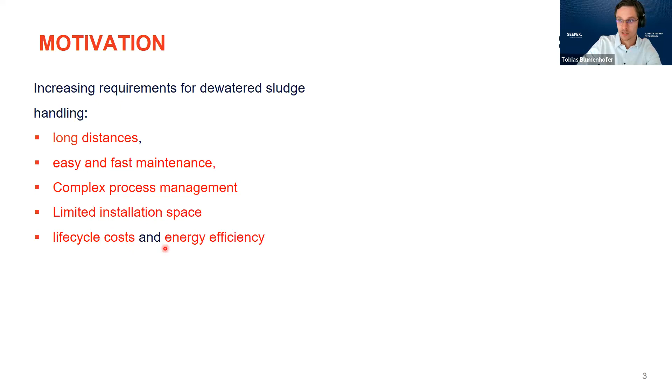What we here at SEEPEX experienced in the market were increasing requirements for the transport and handling of dewatered sludges. Customers need to overcome longer distances, they want to modernize their systems, they require easy and fast maintenance, and they have complex process management to handle on site. In some cases you even have limited installation space. And a topic always important, and getting more important, is that you want to improve the life cycle cost of your system and improve the energy efficiency of the whole system.

So the solution here, what SEEPEX invented, is a combination of two different technologies: pumping by sludge cake hopper pump, what SEEPEX is also known for. We are a manufacturer of progressive cavity pumps, and they can be applied in a lot of sludge applications. We are combining pumping by sludge cake hopper pumps from SEEPEX with pneumatic conveying. You see here one of our T-range pumps, a SEEPEX hopper pump, combined with a pneumatic air system connected to the discharge line, and also a SEEPEX dosing pump connected to the discharge line for the usage of polymers to further reduce friction losses in the piping. I will explain this in detail, but this whole system we call a package unit, smart air injection, SAI, a combined technology giving a hydraulic pneumatic conveying system.

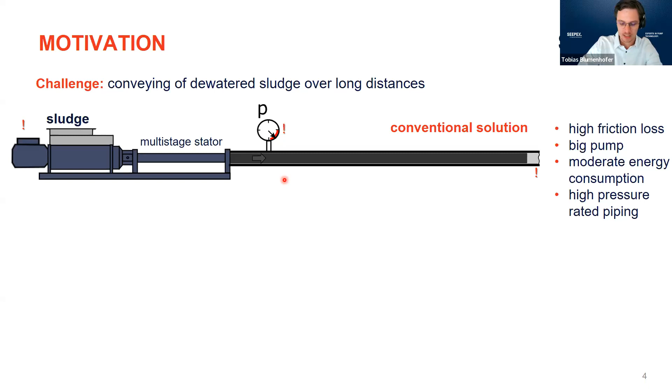So actually, when you go on site and want to transport dewatered sludges, which are normally very high viscosity products with big friction losses and pressure losses in the piping, or any other high viscosity product, and you want to convey it with high pressure pumps, you will see high friction losses you need to overcome. You need a big pump, in this case a multi-stage progressive cavity pump, with moderate to high energy consumption. And due to the high back pressure in the piping when pumping a sludge column, you also need high pressure rated piping. So it's a very challenging task to transport these high viscosity products, and the answer to improve here from SEEPEX is the smart air injection system.

So with SAI, we can use a small pump with low energy consumption. We can offer our customers the use of low pressure rated piping, and due to how this system functions, you only have low friction losses in the piping, and over the whole time a low pressure inside the piping.

How does this work? So what we are doing is pumping with our sludge pump the sludge into the piping. We put into the boundary layer of the piping a lubricant around the surface of the sludge, and then when we have a sludge column of a length of 10 to 50 meters, we open for a short duration a magnetic valve, and then we inject air from our air system into the piping, and transport the sludge only by air to the outlet of the piping. And we found this to be more efficient than standard conventional pumping by high pressure pumps.

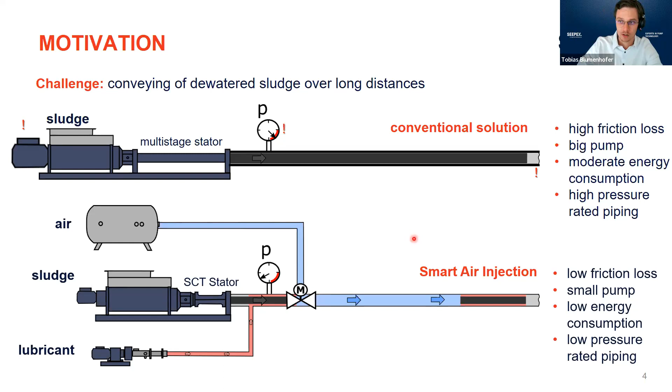So what we can offer with the SAI are low operating costs in terms of energy and maintenance, due to the low pressure in the piping over the whole time. We can offer low total investment with these products due to reduced pipe and fitting costs, because of the lower pressure stability rating required for the piping. So you can use PN16, or even go down to PN10.

For SAI, it's normally no issue to have several bends in the piping or different vertical elevations. So you are very flexible in designing your system layout with SAI and still have an efficient transport. We can go theoretically up to a distance of 1 kilometer. Whether it makes sense to design a system like this is another topic, but in theory it's possible - we can upscale this system to very long distances. And due to the smaller pumps, we can use easy maintenance technology like our SCT technology, smart conveying technology. If you're not used to it already, I will explain later on what SCT is. But with this, we can offer our customers lower downtime due to maintenance in place and increased pump life overall. And compared to open mechanical conveyors, with SAI we can offer you a closed system with closed piping, without odor and spillage.

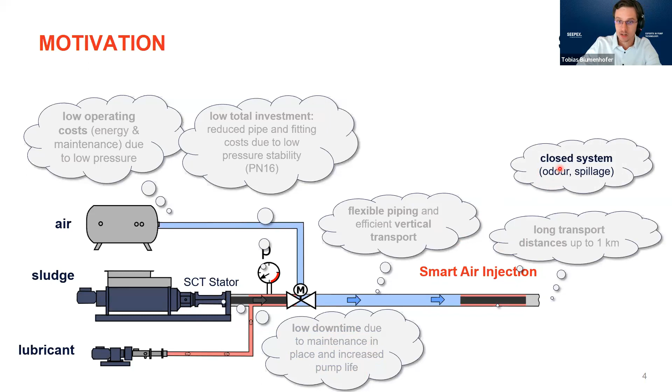And last but not least, SAI is a package unit, and it comes along with its own SAI controller that can be integrated into your SCADA system on site. One last point depends on where you are located on the globe.

We are today a very international round, but in many places where you have winter times and it gets cold outside during nights, where you are not running your system, it's very important overnight to clean the piping so you don't have any freezing. You don't need any pipe heating at all, but a clean pipe can be a benefit in general, not only for winter times. Due to the compressed air we are using, we can offer a system that is immediately able to clean itself, so you have integrated pipe cleaning by air included as part of the system.

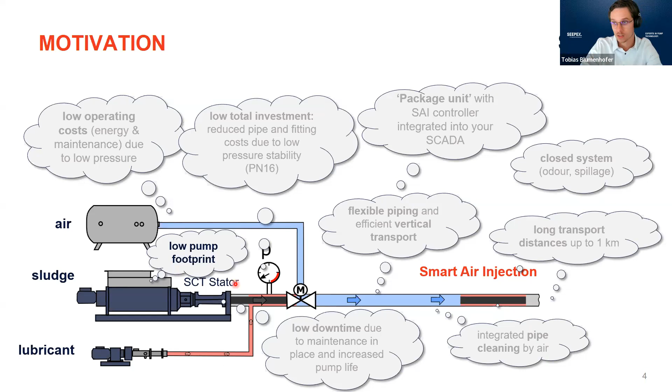And due to the smaller pump, we can offer you a lower pump footprint. So if you have limited installation space or something like this, this would also be a feasible benefit of why SAI could be a solution for you.

So normally the first question now is: you want to replace a hydraulic system with a pneumatic system, knowing that compressed air is very expensive. A compressor is kind of just a heating machine - due to the law of thermodynamics, a lot of the energy gets lost into heat, not into mechanical energy. How can this be more efficient than pumping the fluid? Give me a little bit of time to explain this.

It's not that complicated, but it's due to the nature of different pneumatic conveying types that exist. You can distinguish, as known in the literature, between different types of pneumatic conveying. There's lean phase conveying, when you're transporting pellets or granular media or something like this. But for this lean phase conveying, the relation between air and the line loading is very bad - you need a lot of air to transport a small amount of medium. You need to inject a lot of air into the piping over the whole time so it can drag the particles along. So this is not a very efficient conveying system, but it's necessary for some particles - there's no other option.

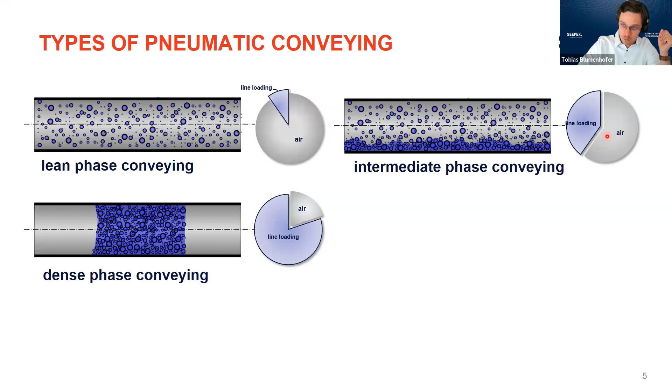And then there is dense phase conveying, which is what we are using with SAI. We have a high line loading and only need a small amount of air in the piping to convey the fluid to the outlet. You have a compact kind of plug in the piping, and this compact plug is conveyed by short-term, pulsed air injections to the outlet. This can be efficient, and we achieve a good energy efficiency because of the high line loading and low air consumption within this dense phase conveying.

And we combine this with a lubricant film in the boundary layer in the piping, around the surface of the sludge, to improve the energy efficiency even further.

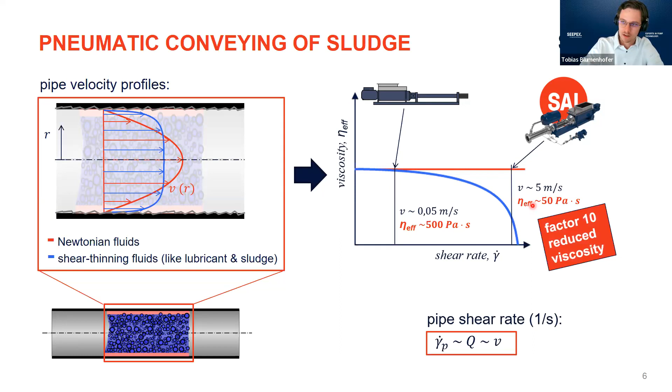So we can reduce with this effect the viscosity up to a factor of 10. Here's an example of a shear thinning fluid. It's not dewatered sludge, it's simple ketchup. But if you put a golf ball on top of this ketchup, it will not sink in. The ketchup acts like a solid fluid, actually.

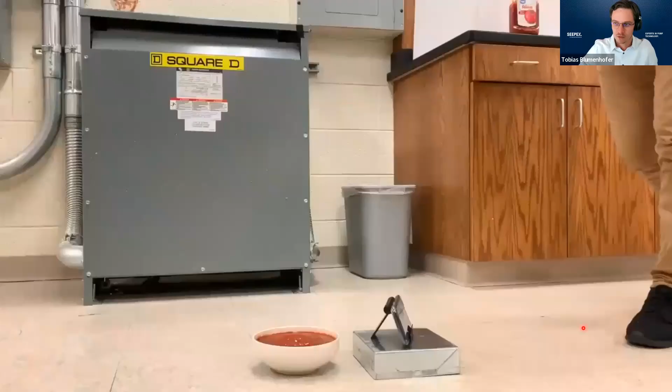But if you drop the ball from the top with a higher momentum and higher velocity, it will sink into the ketchup, and the ketchup behaves like a liquid due to the shear thinning behavior. This is just to show you, nobody would have guessed this experiment would look like this, but this is the nature of the shear thinning behavior. Maybe if you want to make an experiment at home, you can try it yourself.

But okay, so how does SAI now work? We have here the SAI system shown, we have here the pipeline, and here we see we want to transport our sludge into a silo. And here we see a pressure curve.

So over time, how does the pressure behave inside the piping? If we measure the pressure here at the outlet, at the pressure flange here, this is how a typical pressure curve would look like. So we start here, at the blue line, and now our pump is pumping the sludge into the pipeline.

And then here we are injecting lubricant as well into the piping, so that we get our lubricant film. And then by time, we are increasing the length of the plug until we reach a certain pressure threshold, which is - now I will give you some numbers so that you can imagine how the system works.

So when we reach roughly about 1 to 2 bar in the pipeline, we will start injecting the air. For a short-term duration, the magnetic valve will open and the air flows into the system, transporting the sludge into the silo. Okay, this is what you see here.

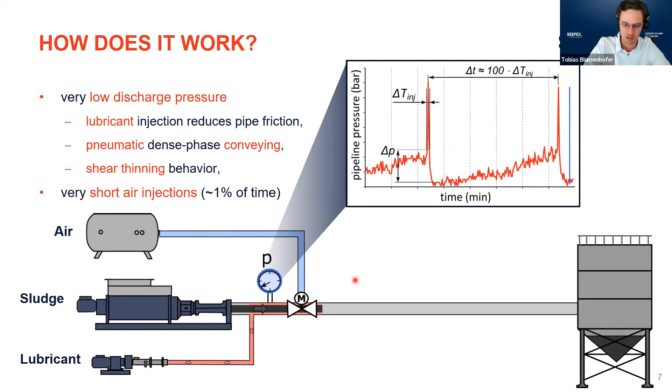Okay, so here's a live demonstration. This was one of the very first tests when we tested SAI. It's already quite a while ago, but still some nice videos to show.

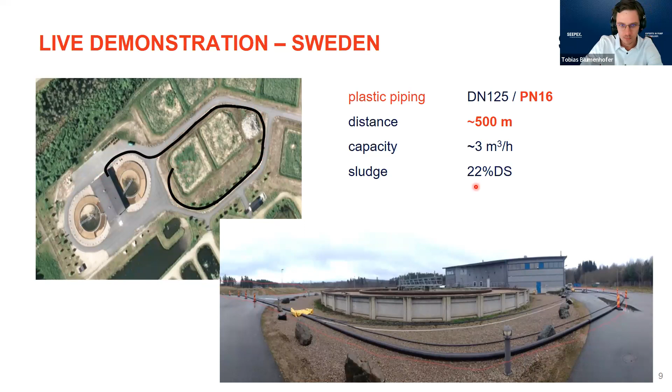For this test setup, we were using plastic piping of DN125 PN16 with a distance of 500 meters and a capacity of 3 cubic meters per hour with a sludge of 22% dry solid content. You see here the piping coming out of the dewatering building, going around this area, around this yard, and then we are conveying onto this yard. And this is how it looks like.

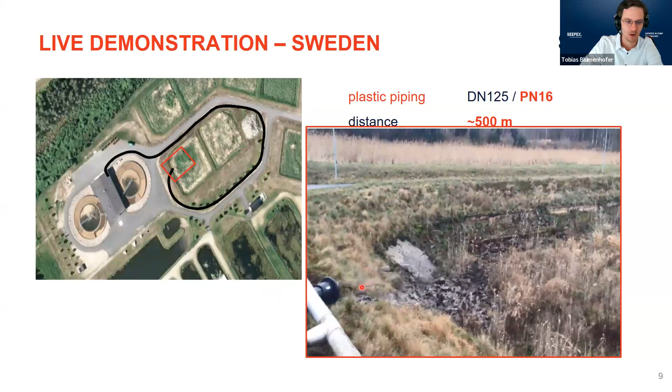You see here the sludge coming out of the piping. You see these plugs coming out and hitting the ground. That's a little demonstration of how the pneumatic transport of these sludges can look like. And you see here the high velocity of the sludges in the piping.

For which applications can SAI be used? We have a strong relation to the wastewater industry. Progressive cavity pumps are used there as a very standard technology. This is why we also started with SAI in the wastewater treatment industry for conveying of these dewatered sludges with high viscosity and high friction losses in the piping.

But we found out also for other industries, this is a relevant technology offering the same benefits I just explained, also for other applications. So as I said, tomorrow my colleague will explain to you how SAI works in the brewing and distilling industry for the transport of spent grains. If you're part of this industry, you should definitely join tomorrow our other webinar.

Definitely worth it. But also for these spent grain transport, SAI offers a lot of benefits. We also found out for waste foods, SAI is an application offering a lot of benefits too. So whatever you might imagine, wherever you are searching for a solution, SAI could maybe be a feasible solution for you. If you have a high viscosity product which can hardly be transported, when you're using either mechanical conveyors to move the fluid or really high pressure rated pumps, really big pumps, then maybe SAI might be an efficient solution for you as well.

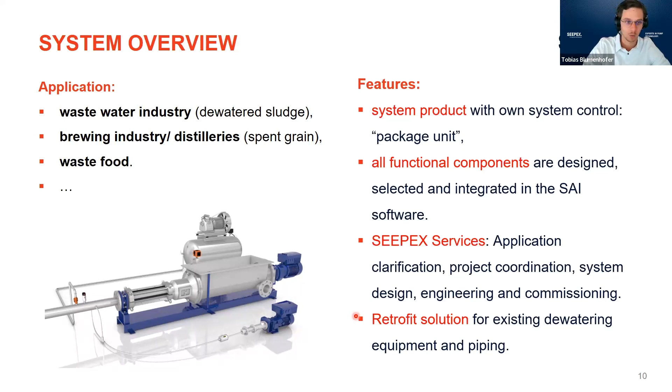So let's talk a little bit about the pumps that come with SAI. At SEEPEX in our product portfolio, we have a lot of different pump types. We have the T-range pumps, which are hopper pumps, which have integrated beside our rotor and stator, which are the main elements of our pump to create the pressure.

We have with the T-range pumps also screws and augers inside the hopper, to transport the fluids with high dry solid content into the compression zone and from there into the rotor stator element, because you cannot suck them in anymore due to the nature of the product. So you have here with the BTHE range, which comes along with SAI, the centric and edge running ribbon screw.

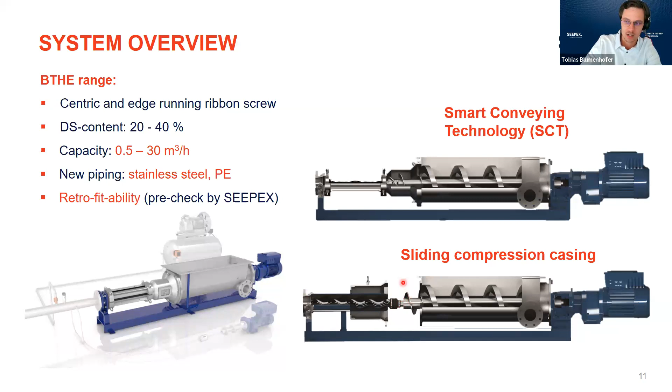Another option would be the sliding compression casing, here called the SEEPEX drive joint access. With this compression casing, you can move this or simply put it away, and then you have access to the rotor joints and can directly disconnect here. This will also improve the maintenance.

Okay, what are the different SAI system options? SAI is a customized system solution, so based on your requirements and specific application and needs, we will design the SAI system.

We have different options for the number of injection points for lubricant and air. This is something we would consider for very long distance transportation - for pipe cleaning and so on, we would foresee different numbers of injection points along the piping. For the transport of the sludge, we would foresee the first injection point for the air, and for long distance pumping we would also consider different lubricant pumps along the piping to maintain the lubricant film around the sludge. But for most SAI applications, one air injection point and one lubricant point is the standard.

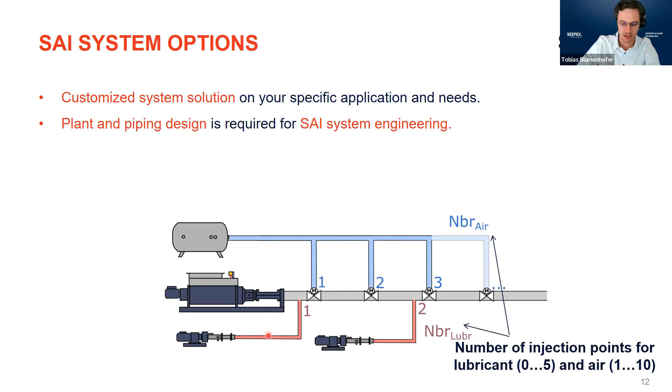Based on the requirements, the piping design and layout, we will size the system - the flow rate, dry solid content, and so on. We will size the pumps and also the air components.

You can order the air components directly from SEEPEX as well, or organize them yourself based on our specifications. You could also use an extension hopper by SEEPEX to connect, for example, to a centrifuge.

I skipped here the material options for the valves and fittings - normally we use stainless steel components as standard. You also have the option for different level control technologies, so you could use radar, laser, or load cells.

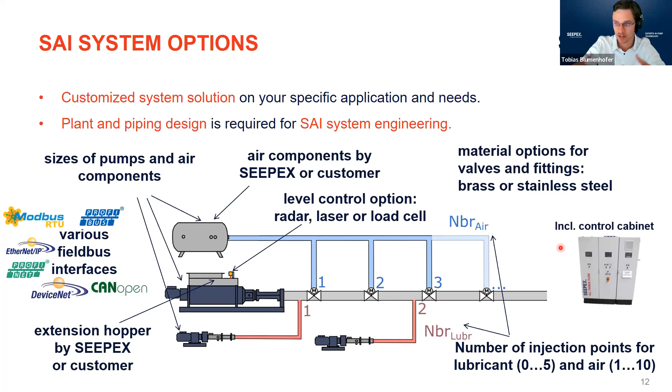Via different field bus interface standards, we can connect - we are flexible here and can connect to your SCADA system so that you are able to control SAI also out of your control room. For all the hardware, the PLC and so on, we can offer you a control cabinet from SEEPEX so that you get a complete system solution for the SAI from us.

So the system overview - let's talk about the special components here. You have the hopper pump part of the SAI system, the compressor, the air receiver, and we have a specially designed adapter spool piece here.

Here we have the laser level control in this example, but you could also have a radar sensor or, underneath the pump, load cells. With these technologies, we could realize the level control. We have also included overpressure protection, and temperature sensors for dry running measurements, so that we can give a warning when the pump is running dry.

Here's a more detailed sketch of our specially designed adapter spool piece. You can screw in all the sensors required for SAI control, such as our injection pressure sensor. Then we have the manifold for lubricant and flow separation of the lubricant, so that we can evenly distribute the lubricant around the surface of the piping.

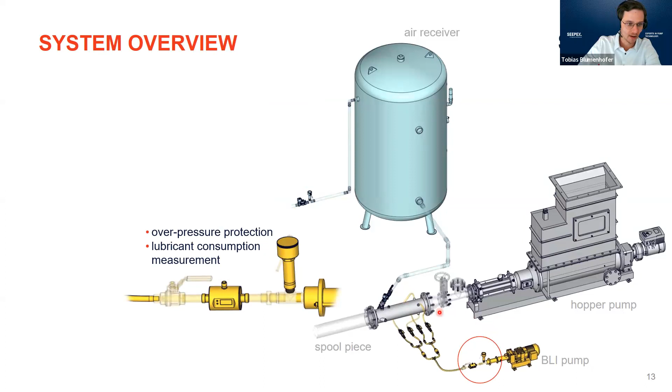Then we have a specially designed air valve set, which contains manual ball valves, non-return valves, and the main actuator, here the solenoid valve. Between the compressor and the air receiver, we also have an air consumption measurement device. On our lubricant pump, we have overpressure protection and a lubricant consumption measurement device.

You might now ask, why do I need such an air receiver? Why can I not directly connect the compressor to the piping for air injection? Normally we have cycles with a pause time of 5 to 10 minutes between every cycle, and during this time we can use a small compressor to slowly reload the air receiver. But when we open the solenoid valve to transport the sludge to the outlet, for 10 to 20 seconds we need a rather large amount of air. This is why we have an air buffer between the compressor and the SAI pump, or between the piping.

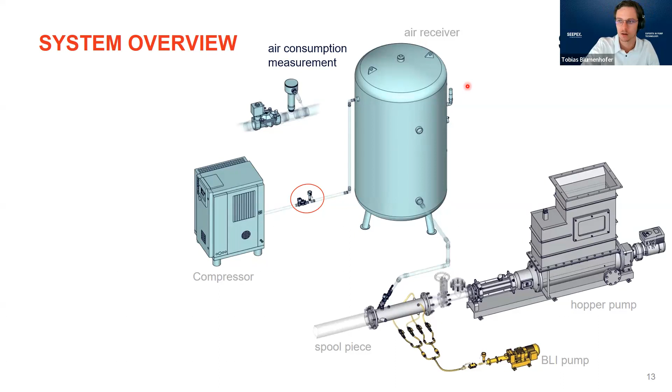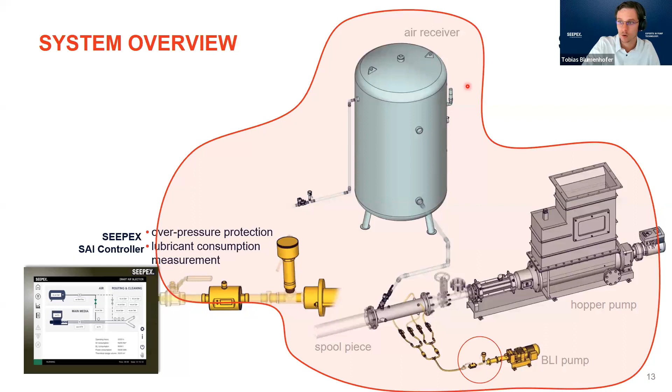Last but not least, all the actuators and sensors are integrated into the SEEPEX SAI controller, which is the heart of the system. It's a Siemens controller, or it could be an Allen Bradley controller - we offer platform independent controls. The controller is for visualization and monitoring of the SAI process, including fault diagnostics.

From here, you can control flow rates like sludge and lubricant, and control air injection for dense phase conveying, as well as all safety functions like overpressure and dry running. You can measure the consumption of compressed air and lubricant, and from here we can integrate into the SCADA system via field bus communication.

On top of this, we can also connect the PLC via the SEEPEX pump monitor to our monitoring cloud, which is the SEEPEX connected services. From here, you can get access to a dashboard and see all the data on the condition of the SAI system.

So when you have, for example, a center for maintenance planning, the people doing the planning also have access to the SAI system, to look into the system operation and operating point. You can see the air consumption, current, speed of the pump, or whatever values we are measuring in the field shown here.

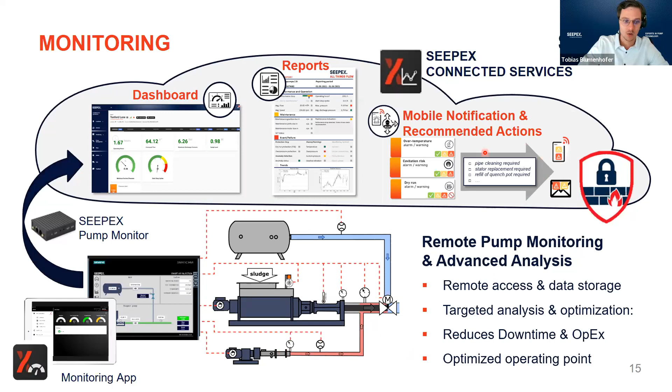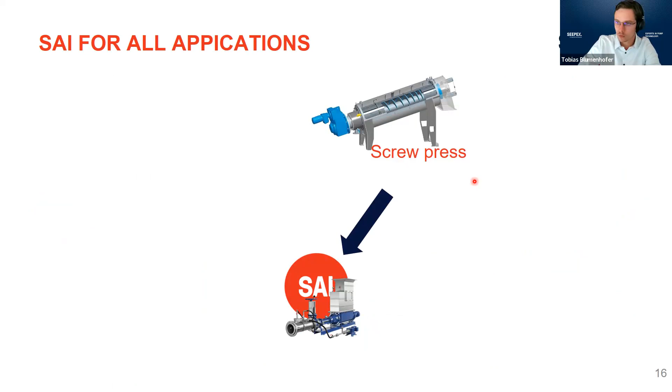So for which dewatered sludge types of application can SAI be used? We have installations in the field already with screw presses, belt presses, filter presses, and centrifuges. We can install the pump underneath a silo for emptying, or we can convey into a silo with SAI.

We can install SAI underneath a reception bunker. We can also convey into solar drying systems, which especially in the south of Europe gets more and more interesting. So for all these applications, SAI is a feasible solution.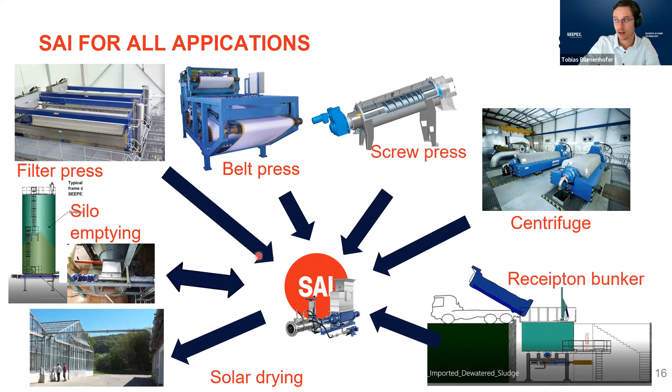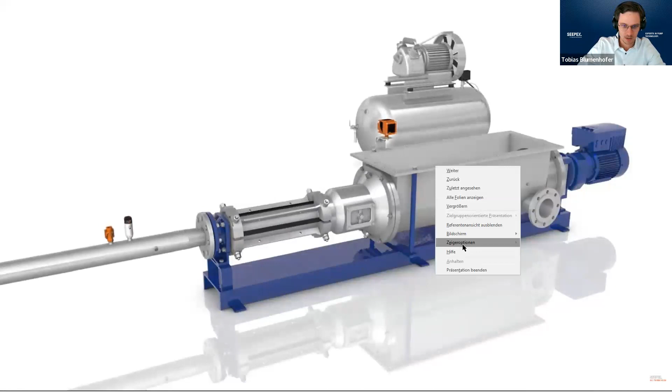Now let me finalize the theory part with a small animation so you get a feeling of how this looks. Here you see our BTHE SEEPEX hopper pump, with the air system connected to the discharge line, the magnetic valve, the pressure sensor, and the lubricant pump connected to the discharge line. Here you get a view into the pump.

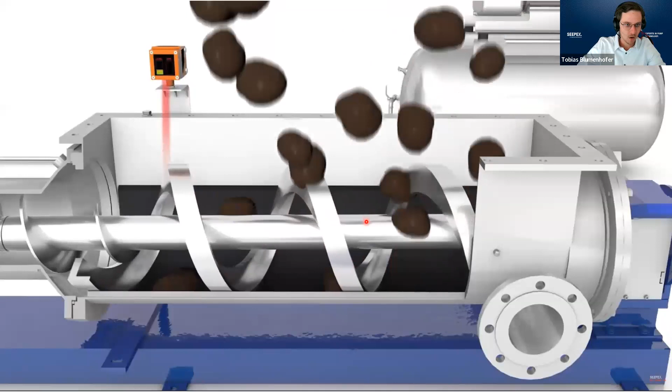Here you see the auger rotating and the sludge coming from the top, conveying the sludge into the compression zone of the pump. Here you see the laser sensor recognizing that the level is increasing and the pump speeding up. This is our level control system to avoid overfilling of the system.

From here, the sludge gets into the rotor stator elements, where we lubricate it with a lubricant film. As described before, we are measuring the pressure, and when our control system recognizes we've reached the pressure threshold, we switch and open the magnetic valve, injecting air into the piping for a short duration. Then this cycle repeats.

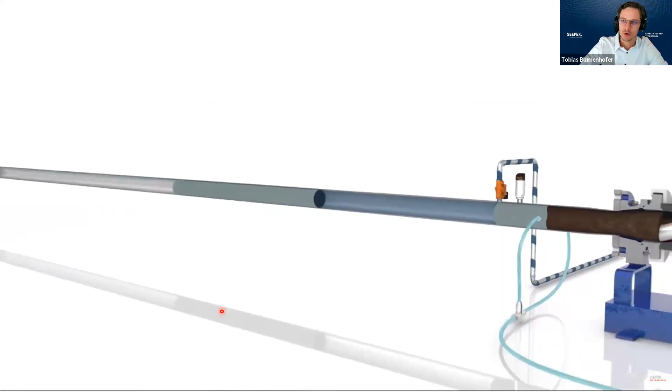Okay, let us go further on. I will go ahead with a look on the time, and try to keep it short and not too boring. We have seen a lot of theory and a lot of benefits I claimed you have with our SAI system, but now what is missing is the proof of this concept. That's why I put some case studies in here to discuss with you today, to give you a feeling of the efficiency of the system, what the costs are, and how it compares to other technologies.

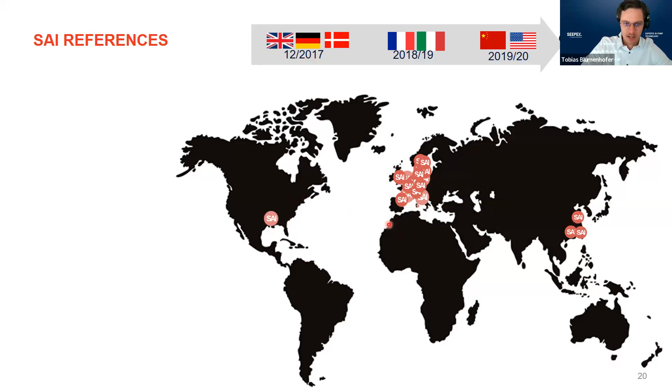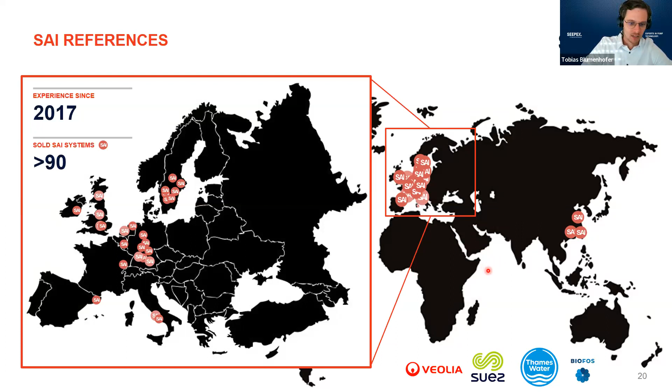So let's go ahead. We have, in the meanwhile, a lot of SAI references in Europe, where we started initially in 2017 by launching SAI. We now also have installations in the USA and in China, but our core, since that's where we started the launch, is still Europe. In total we have over 90 SAI systems already sold, including to customers or names that might be familiar to you - we have installations at Veolia, Suez, Thames Water, and BIOFOS in Denmark. So big water authorities already have SAI installed on their site for transporting dewatered sludges, and we see more and more interest in the market for this technology. Let's move to a case study from Germany.

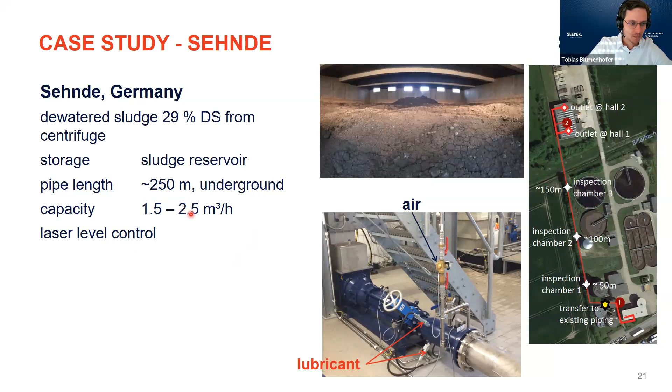Here you see the SAI system, our BTHE pump with SCT technology. Here you see the lubricant injection, and here you see also the air injection. We are using laser level control technology. Pipe length is 250 meters, capacity going up to 2.5 cubes.

From another perspective, you see the dewatered sludge falling from above, from the centrifuge into the pump, and it is then conveyed into the pipeline. The piping starts here at the centrifuge coming from the dewatering building, then conveying underground 250 meters, even below this river, into hall 1 and hall 2.

Into the building here. The initial condition was that the customer had a piston pump in use, and their pain was that they had significant maintenance and energy costs. They had an installed driveline up to 45 kilowatts, and during startup phase of the system they had realized 80 bar in the piping, and in operation 70 bar.

The maintenance cost for this piston pump was 15,000 euros a year, which is already a lot. And they had also to inject 300 liters of water to convey the sludge into the building 250 meters away, to make it pumpable at all.

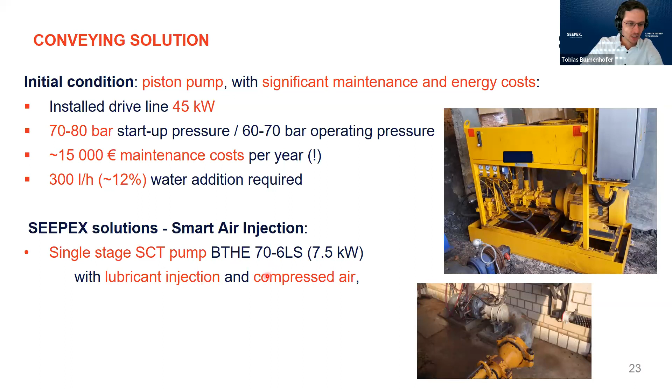So the SEEPEX solution we foresee here was our smart air injection system with single stage SCT pump, with 7.5 kilowatt drive, with lubricant injection and also compressed air. The challenge was they had installed a steel pipe DN200, PN160, really high pressure rated piping because of the piston pump installed underground.

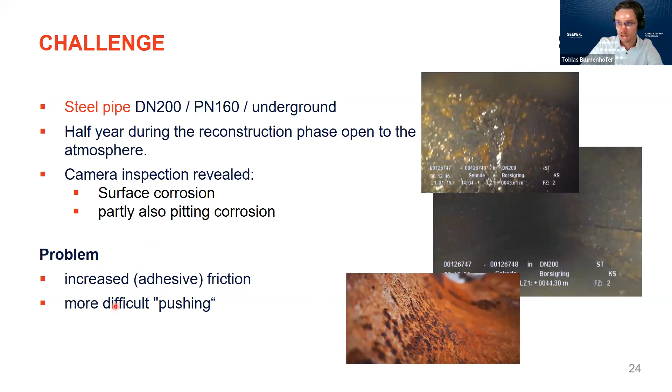Unfortunately, during reconstruction, the steel pipe was open to atmosphere, and they had some severe issues with surface corrosion, and partly also pitting corrosion. The problem due to this corrosion was increased friction, and it was also more difficult for the SAI system to push the sludge through the piping.

Nevertheless, SAI is now running here since 2019, and since then they are using the system, especially in the first 2 years - we are now in the fourth year. I would need to ask our sales experts if they are still running without spare parts, but for 2 years they were completely running without spare parts, which was already a giant step forward compared to the piston pump.

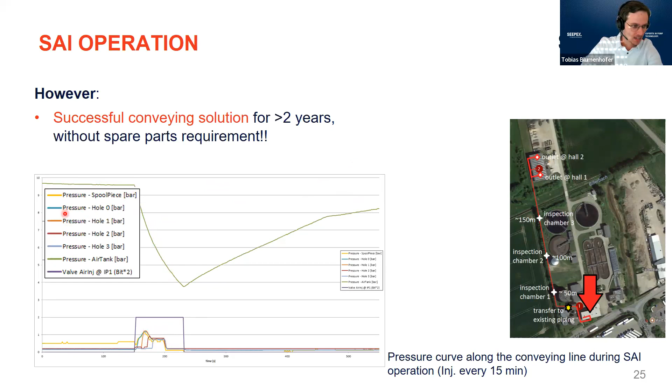Here you see also the pressure curves. Here we have the pressure inside the air vessel. When we are injecting air, the pressure is dropping, and here we see the pressure in and along the piping. We had different positions where we measured the pressure inside the piping - position hole 0 to hole 3.

When the air is injected and the plug is transported along the piping, you see the first pressure increasing, the second one, the third one, the fourth one, the fifth one - 1, 2, 3, 4, 5. Then when the plug leaves the outlet, the pressure is immediately dropping, so the pipe is cleared and the sludge has reached its destination. The cycle has an injection roughly every 15 minutes.

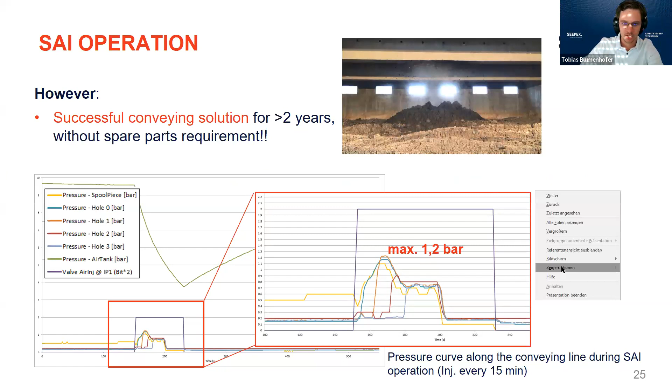I just want to show you a video. You might now ask, how does it look like when the sludge enters the building here? You see this smooth breathing of this sludge hill - the sludge enters very smoothly into the building.

Let's discuss the life cycle costs a little bit. The Stadtwerke Sehnde, the municipal wastewater organization, gave us their life cycle costs they had for the piston pump, and we compared this to the new SAI installation here.

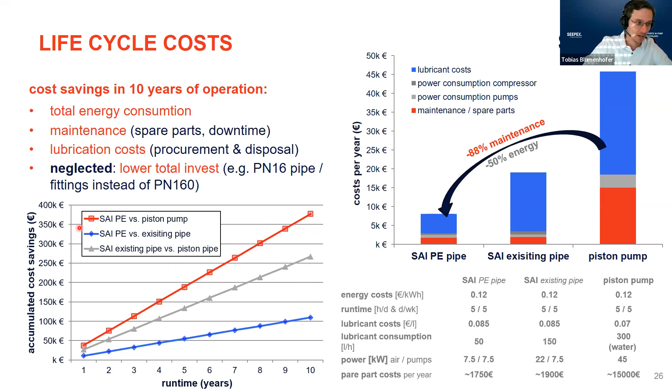So you can save here over 250,000 euros in this period. This was the Stadtwerke Sehnde here in Germany.

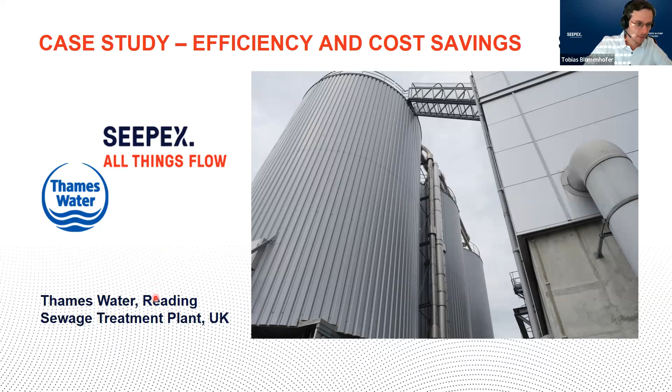We have another example from the UK, where we have already a lot of SAI systems installed in the meanwhile, especially for big water authorities like Thames Water, Reading, a very big sewage treatment plant in the UK. So the plant condition here looks like this.

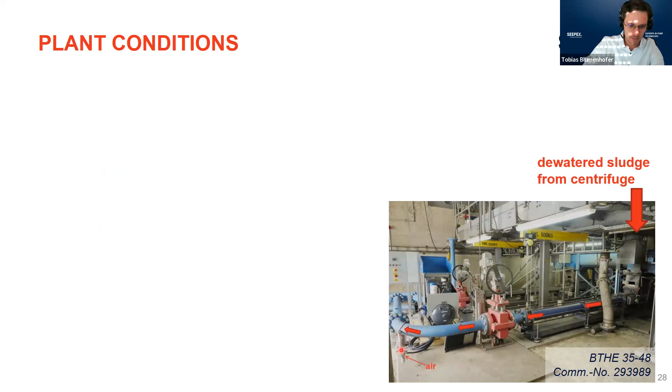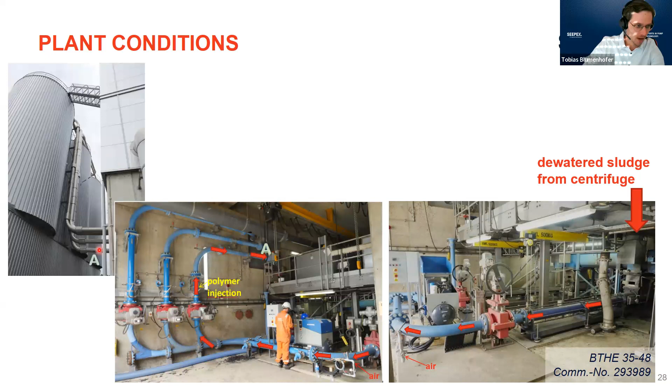You have here the sludge coming from a centrifuge into the pump. So the dewatered sludge from a centrifuge is then transported along the piping. Here is the air injection, and then we have 3 different destinations where we can transport our sludge to - silo A, B, or C.

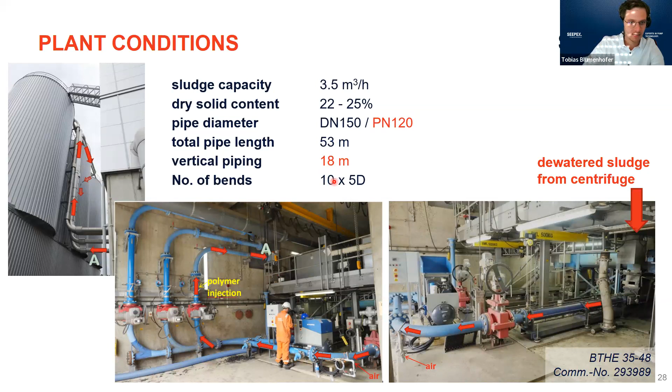The data here: sludge capacity 3.5 cubes, up to 25% dry solid content, DN150 pipe diameter with PN120 pipe pressure rated piping. Pipe length 53 meters, 18 meters vertical, and 10 5D bends in the piping.

And the status quo was that the customer here had big pain due to the piston pump, which was unable to handle the 25% dry solid content sludge, and which exhibited enormous maintenance and energy cost. That was the initial situation.

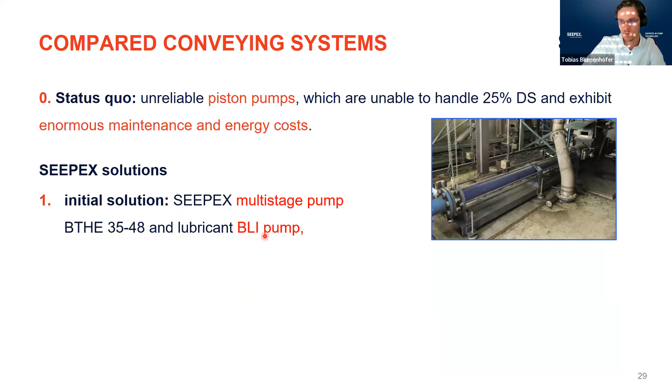Then SEEPEX installed a multi-stage progressive cavity pump, an 8-stage pump. You see the size of the big rotor and stator here as well, so it's definitely not a small pump. It needs also to overcome big pressure. But we combined it here with a lubricant pump to reduce the friction losses already to an acceptable level.

Then we installed a trial installation, a mobile compressor, just for testing. This was the first trial installation, where we then tested the SAI with the multi-stage pump and the BLI. And the optimum solution here for this application would be a one-stage SCT pump with BLI and SAI.

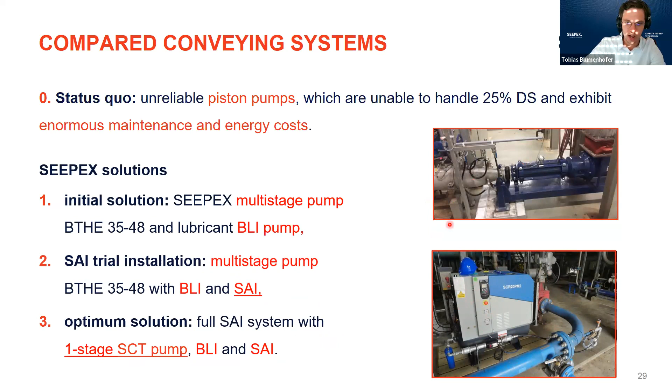We have here a very similar application on another site, which we can use the data to refer to. So this is what we have done here, and we compared the energy savings from the piston pump to the multi-stage PC pump to the multi-stage plus air to the one-stage SCT and air. We already achieved big savings, a big step forward compared from piston pump to the multi-stage progressive cavity pump. But we could even improve with multi-stage plus air.

So from 27 kilowatt roughly to 7.4 kilowatt. But here you have then on top the power for the air consumption, which is here 2.6 kilowatt. And then we have here the rating for the one-stage SCT plus air, which is here roughly about 3 kilowatt, with 4 kilowatt air on top.

And these were measured results, based on a similar plant. With this, you can save up to 72% in terms of energy, from the piston pump to the SAI system. But don't forget the operating pressure - piston pump coming from over 60 bar, we are now down to 2 bar in operation, which is a big step.

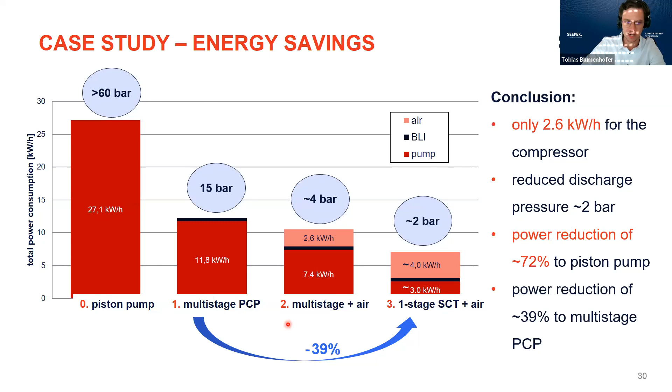But even compared to the multi-stage PC pump, we normally can experience for those applications up to 40% in terms of energy savings.

Thames Water were also open to give us data on their piston pump and what they consumed in terms of maintenance cost, energy cost, and use of polymer. They used the piston pump without any lubrication, which we had to add with our pumps and with the SAI. But in total, compared to the piston pump, we can save 80% in terms of maintenance and 72% in terms of energy.

This was also a retrofit application, PN120 piping, compared to PN16 or PN10. If you would plan a new system with new piping, you would achieve a lot of savings in your investment.

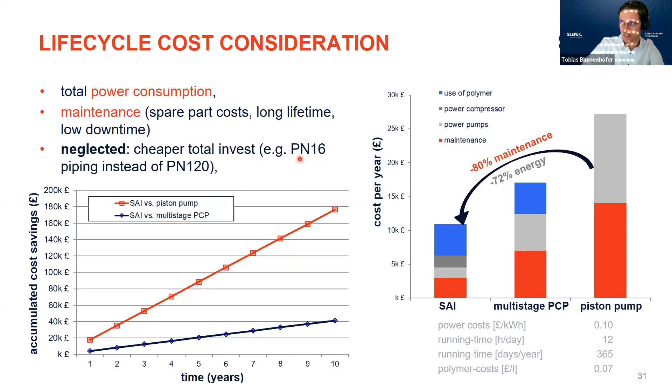Okay, last but not least, Osberstown, Ireland. This is an application from Veolia. I like this application because it shows you how flexible you are in designing your process with SAI, especially due to the smaller pump footprint we can offer you.

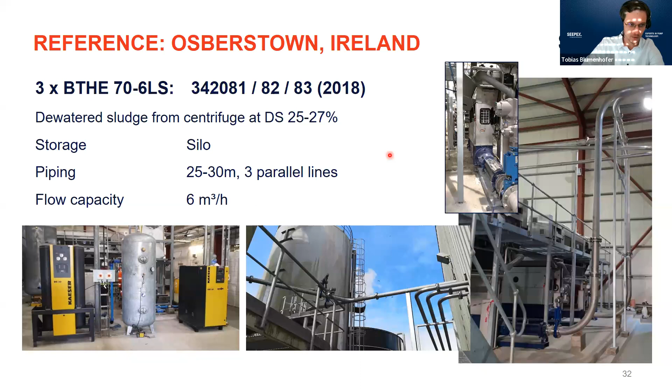The challenge here was that Veolia wanted to exchange their thermal dryer system for an anaerobic sludge digestion combined with the thermal hydrolysis process, in order to save CO2 emissions. The challenge was to integrate the new process into the existing building, which was originally designed for 2 sludge dryers. But now they had to fit in the new sludge dewatering system with 3 belt filter presses, a new polymer preparation station, and the THP process.

Veolia had designed an Exelys process which already reduces the installation space required for THP, but there was still not enough space for conventional sludge pumping systems.

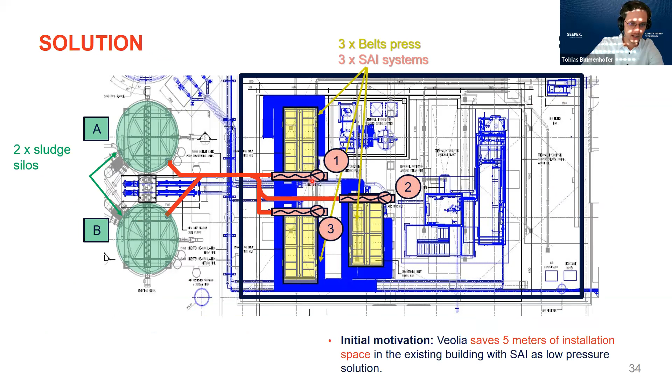So here's the layout. We have the silos, the 3 belt presses, and here we have the 3 SAI systems. There was not enough space for big pumps, but with SAI, they could fit the whole process completely into the existing building.

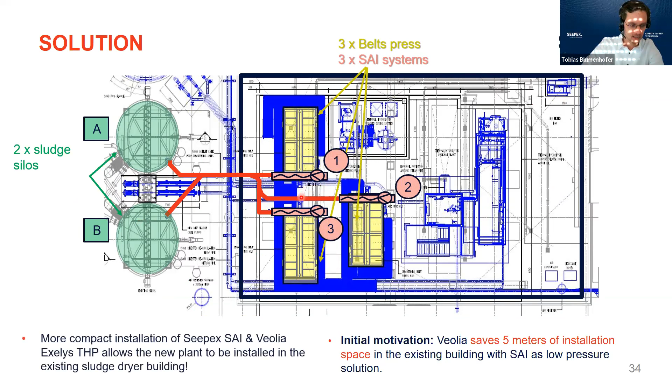We also compared internally the SAI against our 4-stage pump in terms of lubricant consumption, energy savings, and spare part costs, and came to the conclusion that we have savings in terms of maintenance and energy as well, up to 64 and 40%.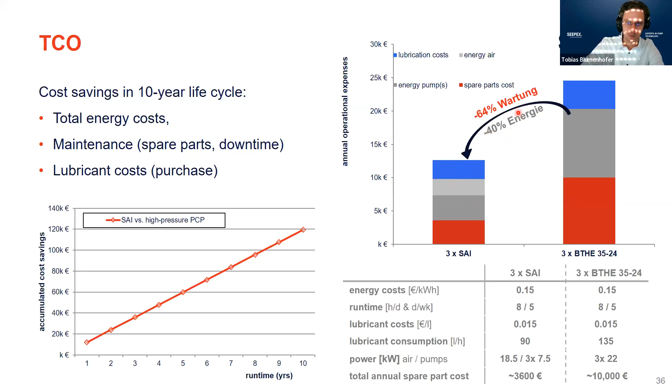The project manager from Veolia, Alan Whitty, and we are allowed to use his phrase, said: I have worked with sludge cake pumping systems for 17 years, but I have never seen anything like the SAI installation at Osberstone. I'm extremely impressed with it.

And Veolia, since then, we are also now in discussion with them for other SAI systems. So I think they were very happy here.

We are allowed to give you the references from Alan Whitty, and we also have references from other customers. So if you are interested in getting in contact with other customers using SAI, and not only hearing our opinion on SAI, we can give you a reference list with other customers already using SAI as part of their daily business.

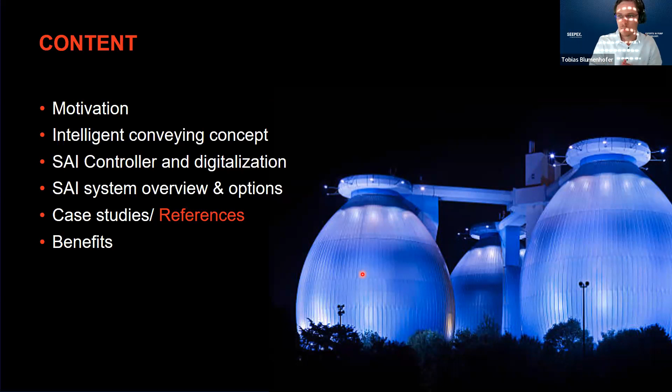Okay, these were only 3 case studies. Now, last but not least, I put together some references to show you a little bit the flexibility of SAI, so that you might see a system where you say, oh, this would be an application for me. So let's start here with a small reference list.

So, wastewater treatment plant, the municipal wastewater treatment plant Kaufbeuren in Germany. We have installed 1 SAI system with centrifuge sludge going up to 33% dry solid content, piping 40 meters, 20 meters vertical. The pump is installed in the basement underneath the centrifuge, conveying into the other silo here. You have the control valves to switch the destination, the controller, the pump including the hopper, and here you see the air station.

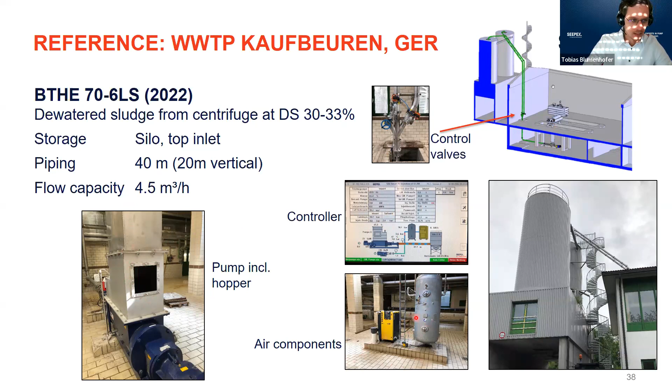Flow capacity 4.5 cubes. So another treatment plant in Germany, in Plauen. Characteristic for this application is that we did not supply our PLC hardware or a control cabinet. We only supplied software, functioning blocks that were integrated into the overall centrifuge control system.

This is also a dewatered sludge application with a centrifuge up to 25% DS. Here you see the air injection valve, the lubricant injection diverter, and the lubricant pump. Flow rate up to 6 cubes, piping only 30 meters here and 21 meters vertical.

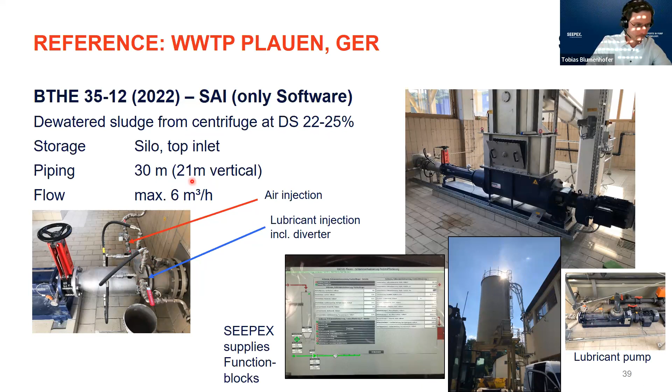Okay, then Optibig, this is a reference in Belgium. Here we are already conveying up to 150 meters, DN200, flow up to 8 cubic meters per hour. We used 2 lubricant pumps, so for this longer distance of 150 meters, we connected a second lubricant pump, but I think it's not in use. We foresaw this lubricant pump, but we found out during system optimization on site that it is not really required. You just use a little bit more air, and it was also working for the 150 meters.

So here you see the visualization of our Siemens PLC. Here you see the SEEPEX BTHE pump with the air injection set and the lubricant diverter. You have different destinations you can choose with the automated valves, so you can either convey into one of the 4 containers or into a silo. Flow already up to 8 cubic meters per hour.

The wastewater treatment plant Hetlingen, I think it's one of the biggest SAI systems in Germany, going up to 15 cubes. We have here 2 parallel SAI systems, each with its own control system, own control cabinet, and separate air systems. You see here one of them and the air components.

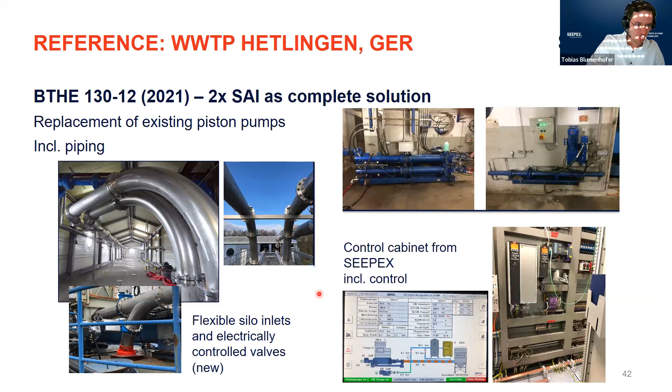A reference for already longer transportation, but with a thinner sludge, 20% DS, Pinghu in China. Here you see a short clip of how it can look in China, such an installation. Here they already had a central air system we could reuse. We supplied the control cabinet, the lubricant pumps, the hopper pump, and flow was not so high, 2 cubic meters, but 300 meters total length and 225 meters vertical, conveying into the top inlet of a silo.

Here a reference of Suez, Napoli North in Italy. Here we are also conveying into 2 silos. You see 3 systems in parallel, 4 cubic meters, 25 meters piping, and here you see our control cabinet.

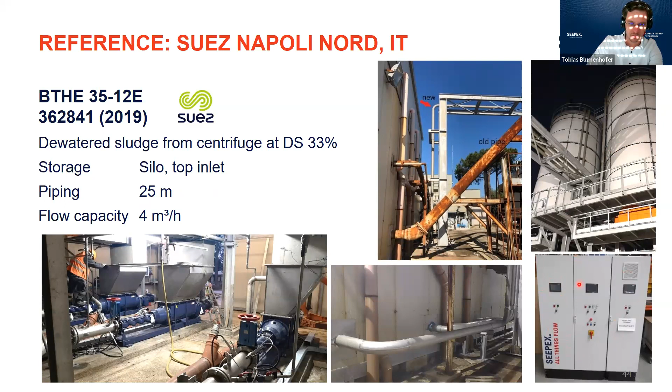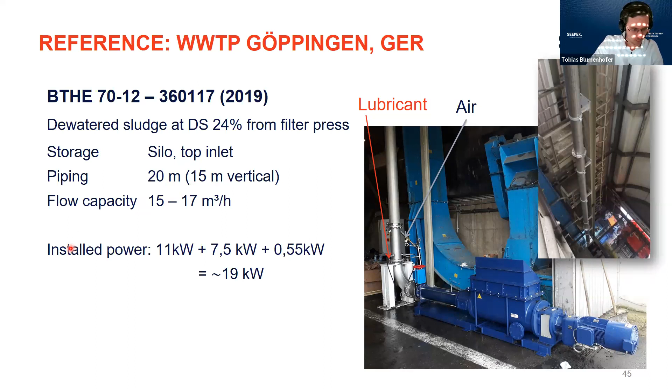Göppingen, also a municipal wastewater treatment plant, but a good example where we exchanged a mechanical conveyor. The customer had installed an old mechanical conveyor, and here you see now our SAI system beside it. The flow capacity goes up to 17 cubic meters per hour, only 20 meters piping, actually 15 meters vertical. But the installed power in total here is 19 kilowatt. The replacement was a 35 kilowatt drive chain conveyor as shown here.

And they had here also big pain in terms of high maintenance costs, over 100,000 euros in 10 years, so roughly 10,000 euros per year.

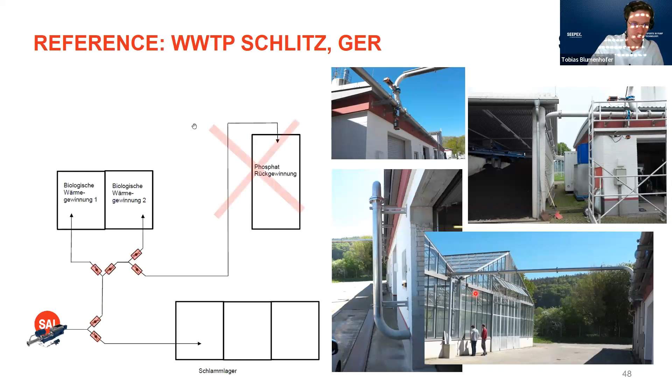Another example, Schlitz, also a municipal wastewater treatment plant in Germany. I want to show this because it's a solar drying system. We are conveying into a solar dryer system. You see the piping on top, and from here we can distribute evenly and very smoothly the piping on the ground. From there, the automatic mechanical pig will distribute the sludge over the whole yard so that it can be dried.

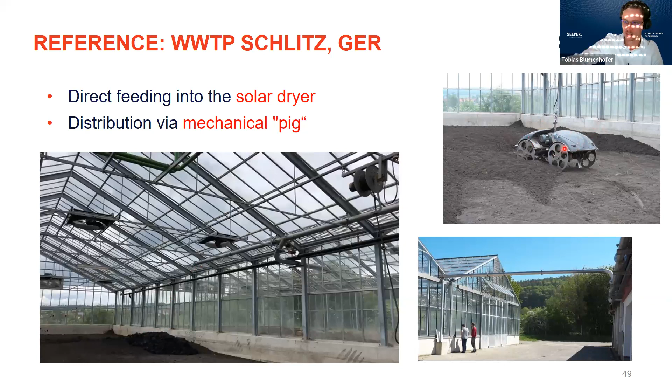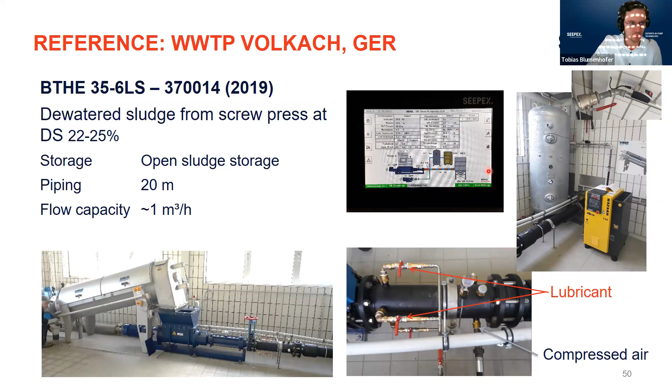Volkach, also an example from Germany. I took this example because it's a good one, as the customer here used complete plastic piping, which is also possible with the SAI system. So we are using polyethylene piping, and we are conveying onto a sludge yard, with the pipe installed under the street.

Before this, the customer was using a conveyor belt that unfortunately blocked access to the road, so every time a car came across they needed to move the conveyor belt. So this was maybe not the best solution in general, which is why the customer was very happy with the SAI system.

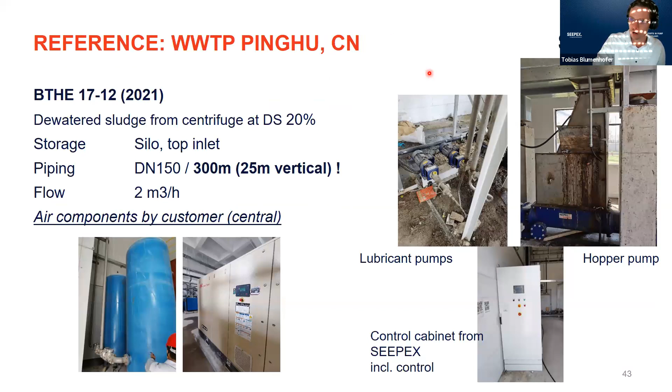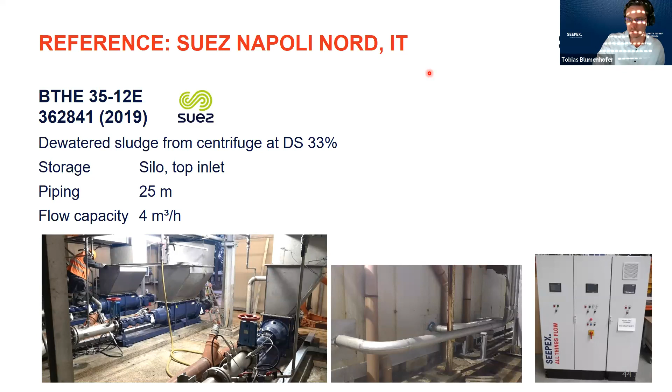The only issue, or what we prefer to use, and this is part of our specification or recommendation, is normally 5 times the diameter bends minimum. Because with shorter bend radius you have too much impulse losses in the bend and the system is not running as efficiently anymore, and you have a higher risk of blockages.

I wouldn't exclude completely that we can use shorter radius bends, but not at the beginning of the piping where the plug is accelerated - this could result in problems. So we normally recommend using a 5 times diameter radius for your piping.

Okay, any further questions? Currently no, we have no more questions. So use the time for questions. No, we can clarify them otherwise. I think, Susanne, they can ask questions afterwards, right? Yeah, yeah, this is no problem.